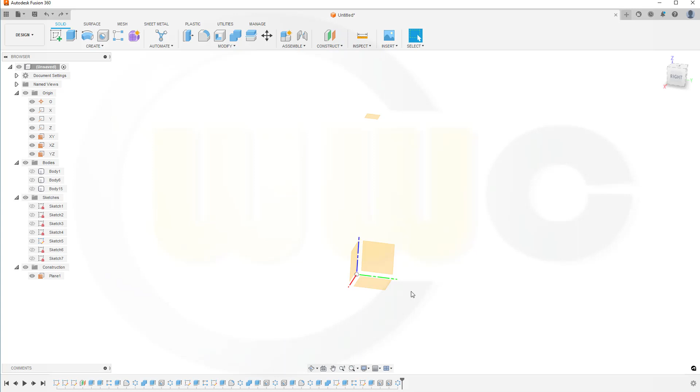Hi, welcome to a Fusion 360 video tutorial. It's a follow-up to the last one, just another way to do that cylinder.

So let's start with a sketch on the YZ plane. That will be a rectangle. And this line should be a center line, so convert it.

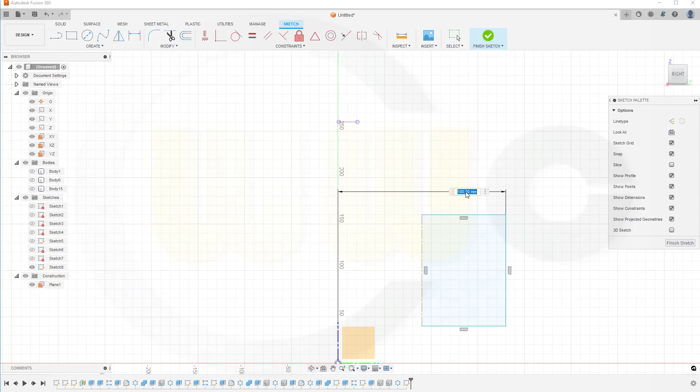And I need to project that plane into the sketch, so go for project, include project, like that, confirm. And I need a diameter. That diameter will be 136, and now I could go for collinear, so that projected plane and this upper line will be collinear.

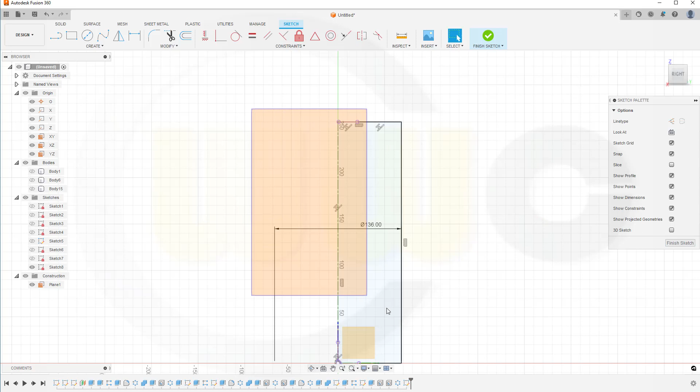Then that one here and this one and those two. And I will reuse that sketch, so I want to copy those elements, so go for Ctrl C, finish that sketch and make a revolve.

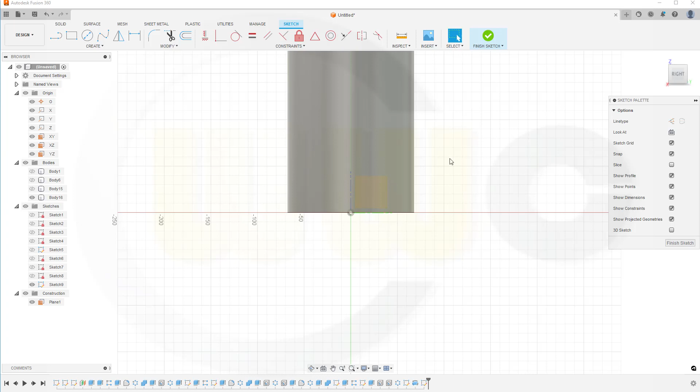And confirm. Now a new sketch on the same plane, on the YZ plane. Let's insert those copied elements and move it a little to the side.

Okay, now I have to change that value to 150, and this should have a dimension, and that should be placed here. So let's go for that dimension.

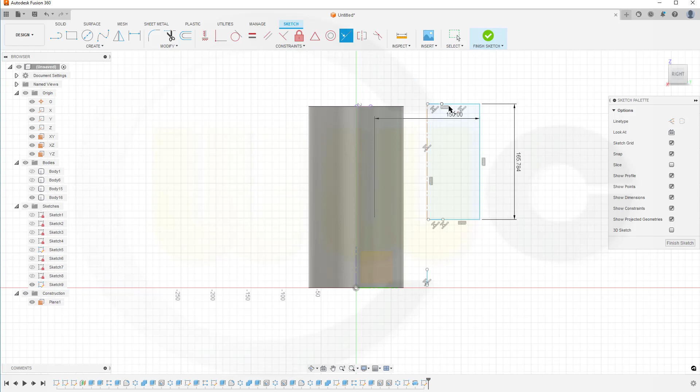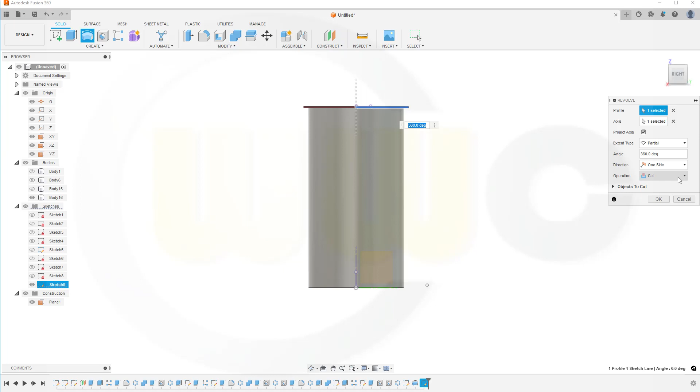And finish that sketch. Make another revolve, and it should not be cut but joined, and confirm.

Now let's do a linear pattern, a feature pattern, so that would be the last feature, this one, and the axis would be the Z axis, spacing yes, 31 instances, distance would be minus 6.67.

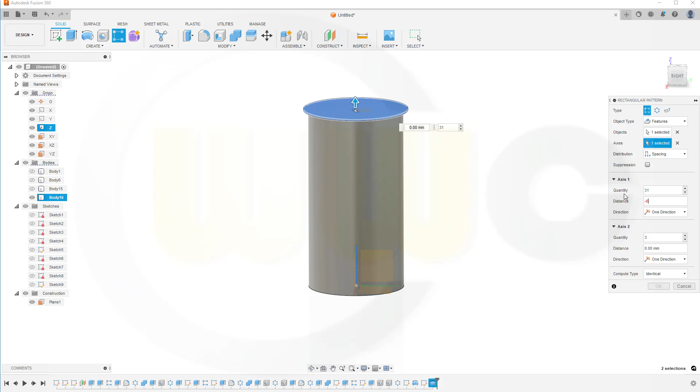And this should be just 1, and I want it to be identical. This looks okay, and confirm.

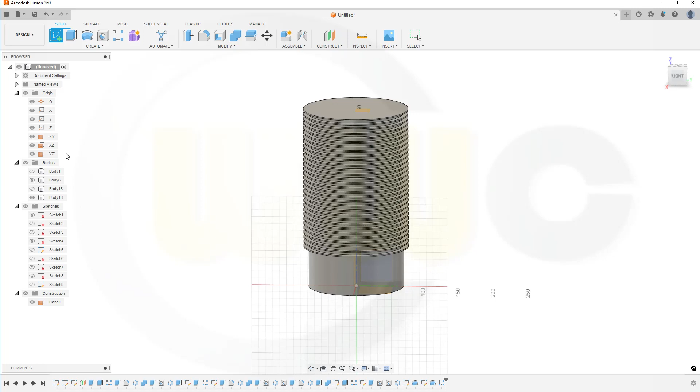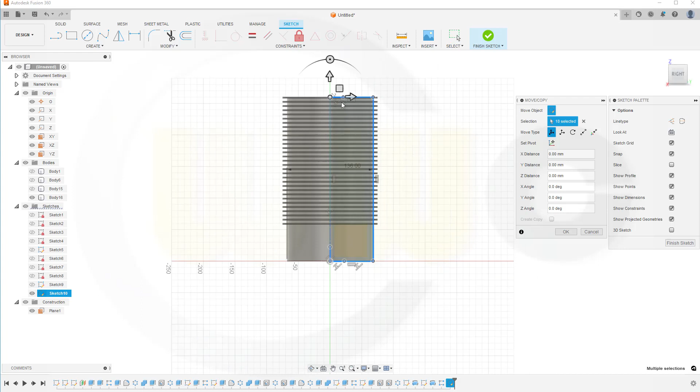Now another sketch on the same plane, and those sketch elements should be still in the clipboard, so let's Ctrl V, move it a little bit over here. Oh sorry, I didn't want to delete it, so let's bring it back. Just move it over here and confirm.

And this should be changed to, so let's go for that distance should be 47. And this distance should be 14. And I need a fillet.

So let's go for a fillet right here. Like that. Sorry, no, like...

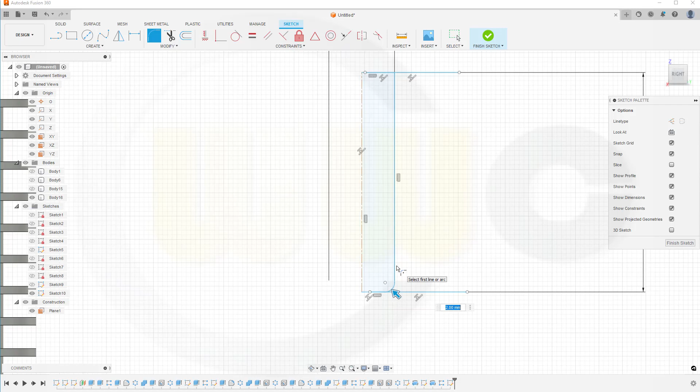I need a fillet from this line here to that line here. Yeah, and the radius should be 7. I don't need this here, and this should be trimmed like that. Looks okay, that's the projection I suppose.

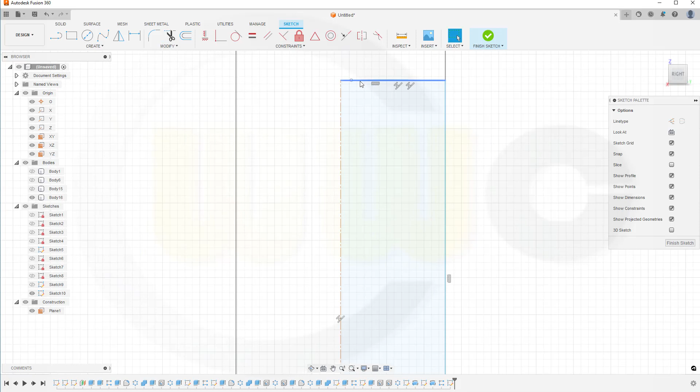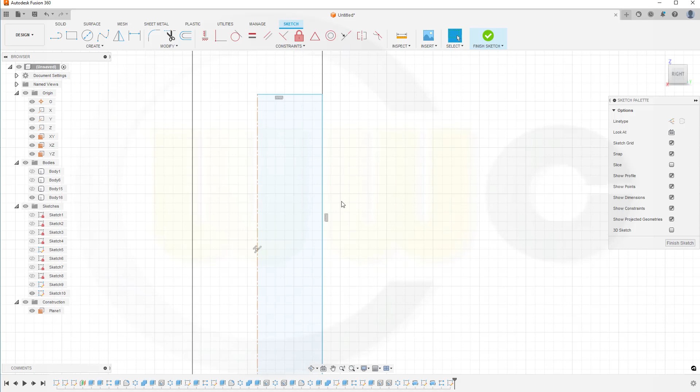So let's go for, where is it? Not there. That's crazy. So let's move this a little bit so we can see this and delete it, because I've copied the projection as well. And this should be trimmed as well. Okay, this looks better.

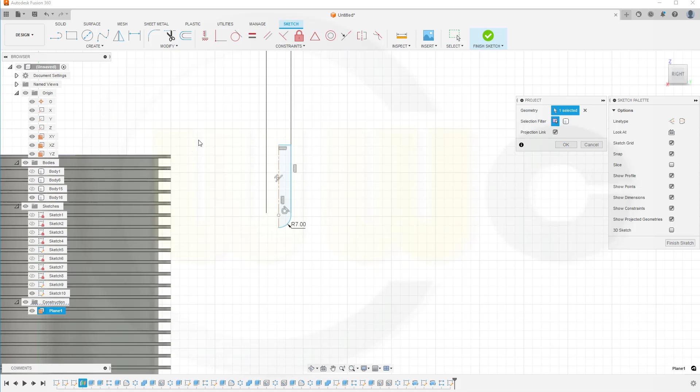And I need that plane projected into my sketch once more, so let's go for project include. Project that plane. And now make it collinear, so that line and this should be collinear.

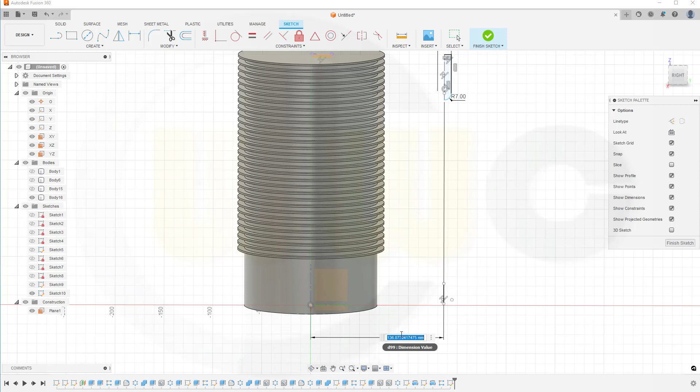And the distance from this line here to that axis here, or that point, should be not a diameter but a normal dimension, and that would be 75. Finish that sketch and make a revolve. And don't cut it, but join it.

That will not work, so I have to go for a new body. No, I can't join it, sorry. Because, yeah. And then we can make a circular feature pattern.

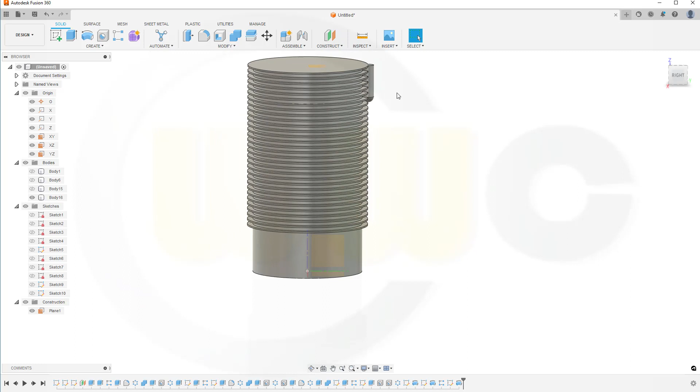So go for a circular feature pattern. The feature would be that revolve. Axis would be the Z axis, and I need 4 instances, full circle, and confirm.

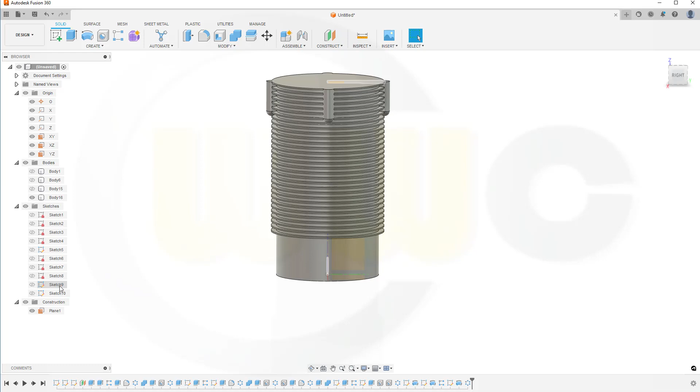Great, let's check that one sketch, this one, because I think that there might be some... no, it's a correct sketch.

Okay, now let's bring back sketch 3 and use it for an extruded cut. Make it symmetric. Whole distance 200. Cut is okay.

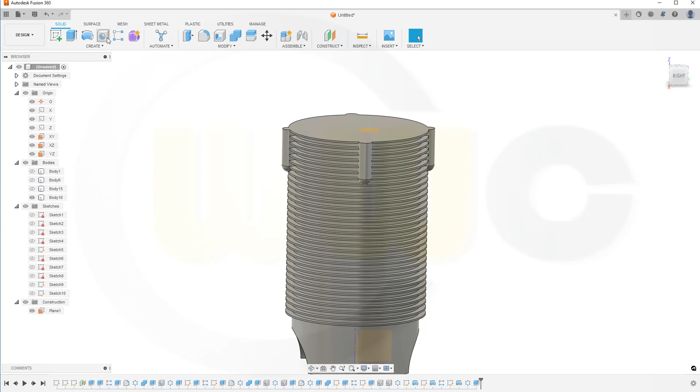Make a circular pattern, feature pattern, yes, that would be the last hole. Axis would be that Z axis again. Spacing yes, 4 instances.

And I need a circular pattern, like that, and now I need 4 instances and confirm.

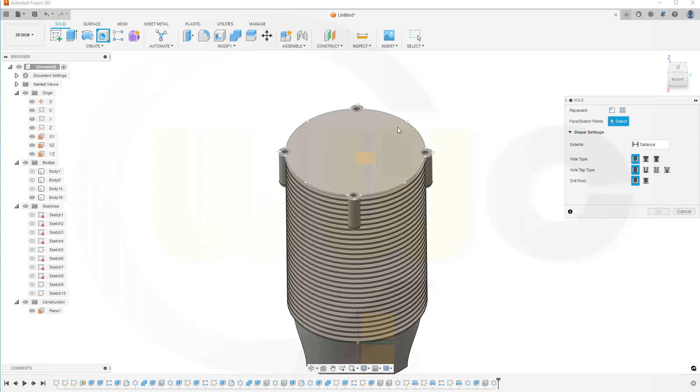Now for the last hole on this surface, it should go through all, and I want it to be 126 in diameter. And select this edge here, so it's centered, and confirm.

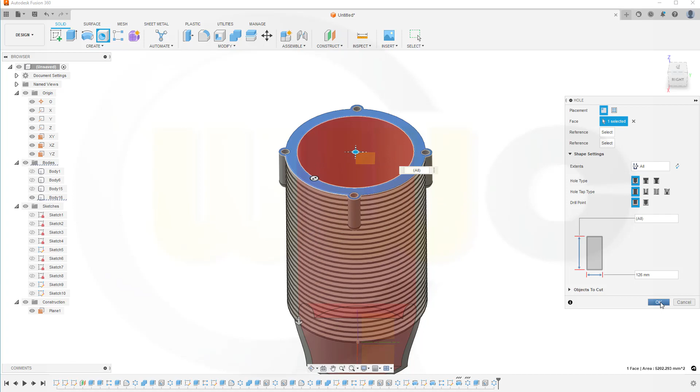And I'm done, so I hope this was helpful.